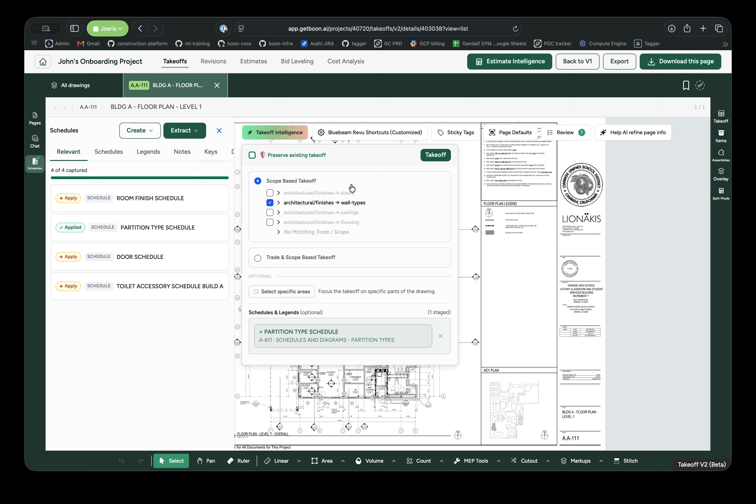Now in this beta mode, we no longer need the user to draw the bounding box. That part is being automated away. So there is a note here, let AI find the wall label for you. They always have the option of drawing it if they want to do it the old way, but now they also have an AI assist.

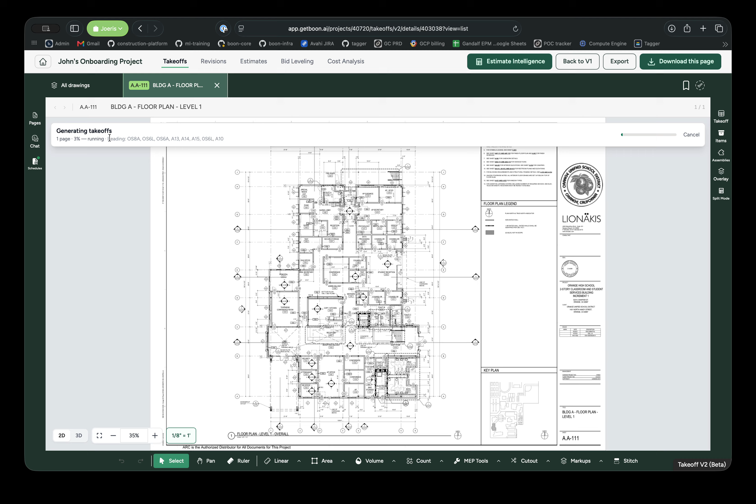And the cool part about this AI assist is how the user now gets feedback about whether it's reading the right kind of wall labels. So in addition to the percentage progress, let's say 3% running, it also informs what labels AI has detected. So here it's saying it's reading OS8A, OS6L.

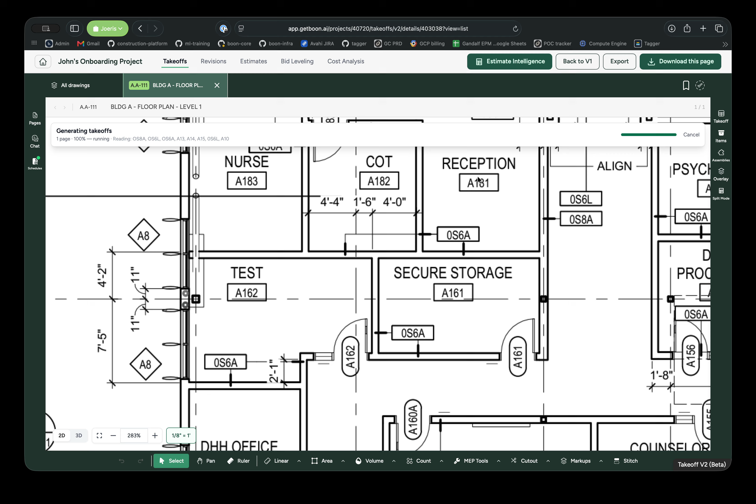As you can see, these are some of the labels that it has correctly identified, OS8A and OS6L. And that gives the user confidence and feedback while the takeoff is running that the AI is picking things up. All right, so you see the walls takeoff. It was pretty fast. We've also improved the speed of it.

And as you can see, a lot of them are now correctly assigned. So first off, the segmentation itself is very complete. So there are no missing segments, even small segments, small walls like this in rectangular spaces. They're all segmented correctly. Even these, as you can see. So segmentation recall is almost 100%.

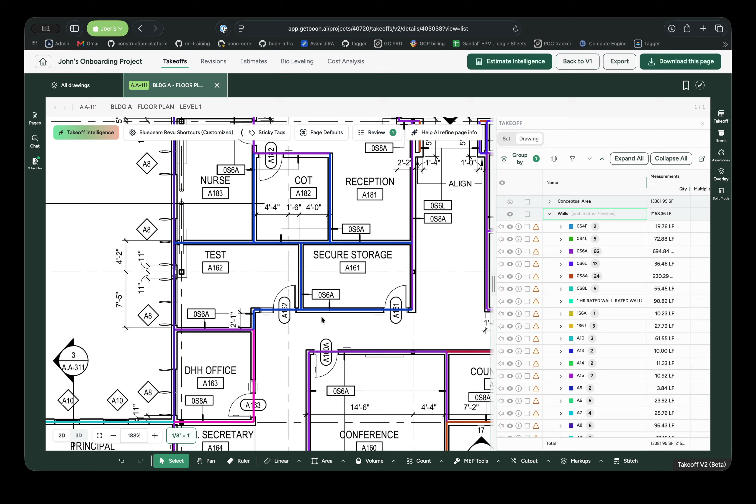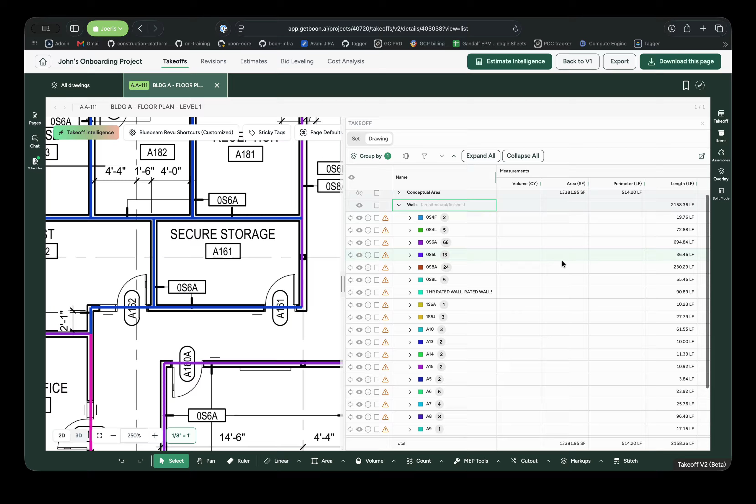No misses. And next comes the labels. So as you can see, a lot of them are labeled. Let's quickly look at the association as well. Association needs to be double checked. As we saw, it did attach the partition type schedule.

It did say applied here, but I don't see the columns here. And of course, this schedule didn't really have, let's say OS4F, it didn't really have any materials, but it had a sill column. And I don't see the sill column here. Oh, there we go, actually.

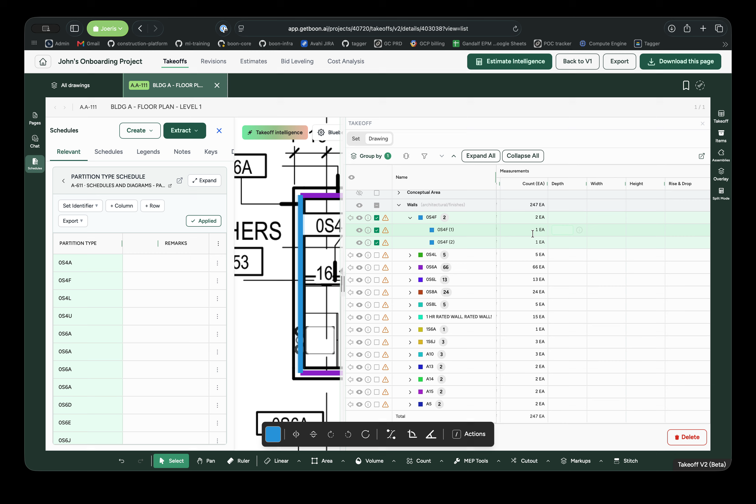My bad. We have the sill column and we have the label classification. So everything has been correctly identified and associated. Awesome. Let's look at a few of these labels. So OS4F is the one we are looking at right now.

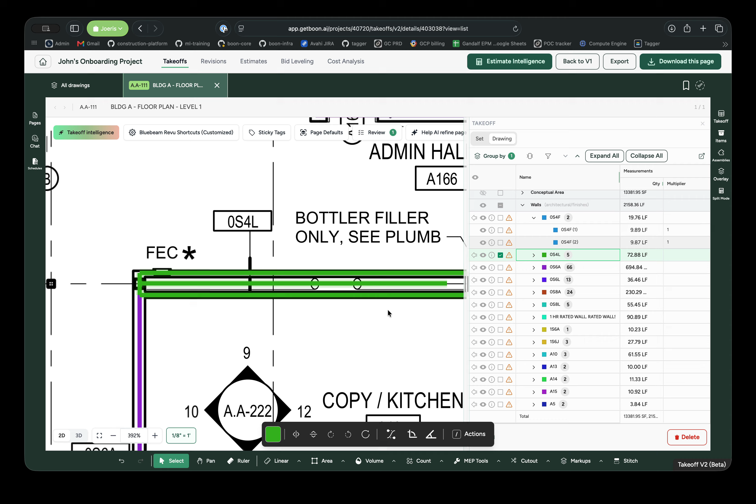OS4L is correctly this. OS6A is a vast majority of them. Yeah, as you can see, this purple one, OS6A, sorry, 0S6A. All of these.

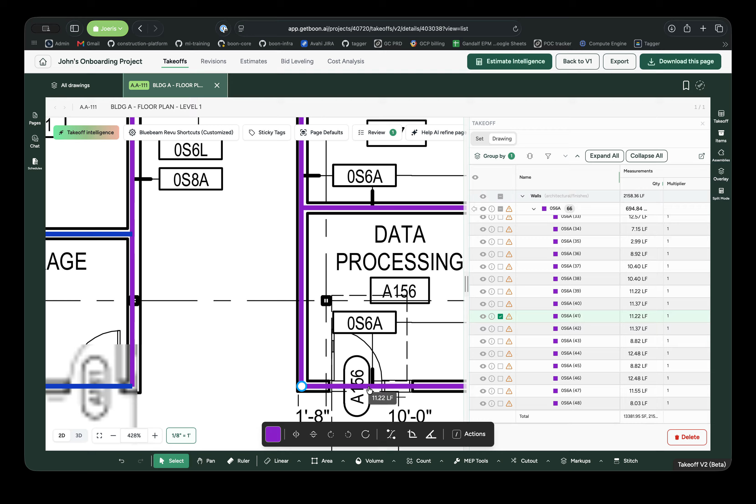Let's move on to the next one, 0S6L. Where is this? Okay, somewhere here. I think we should improve the pan and zoom a little bit on the UI side. Yeah, so it's here. Yeah, there we go. Really, really precise association.

0S6L. As you can see, this is really tricky. It is a leader line that comes here and then splits into a T shape with two leader lines on each side of it. And so what the AI needed to do is associate it with 0S6L here as well as 0S6L here, which you can see it has.

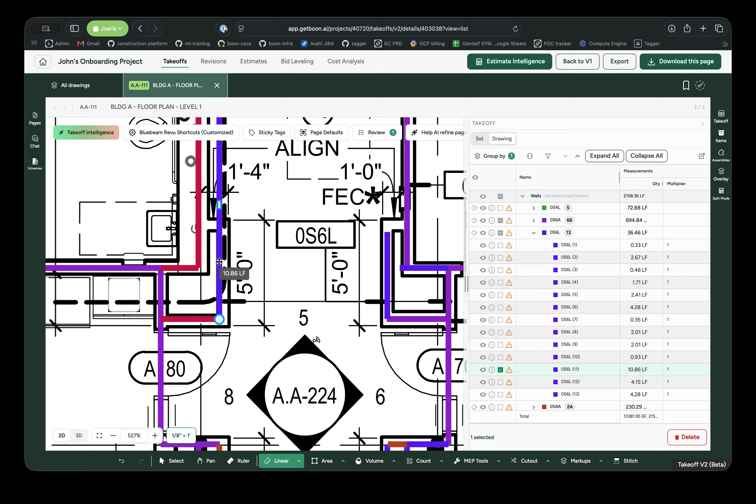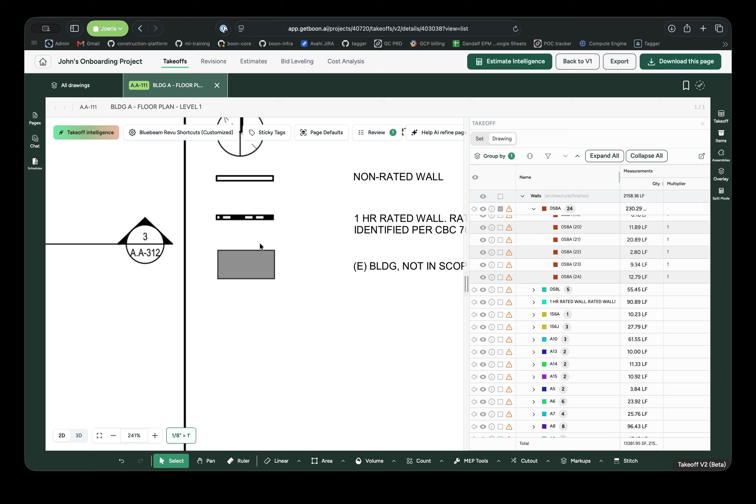Then the next ones are 0S8A, also correct, as you can see here. 0S8A are these red ones. Yeah, let's keep going. The great part is we also now added pattern based. So this has a 1 hour rated pattern here, this dashed dot line for fire rating. So now there's a consistent way in detecting the fire rating. There we go. Instead of all sorts of mishmash of phase.

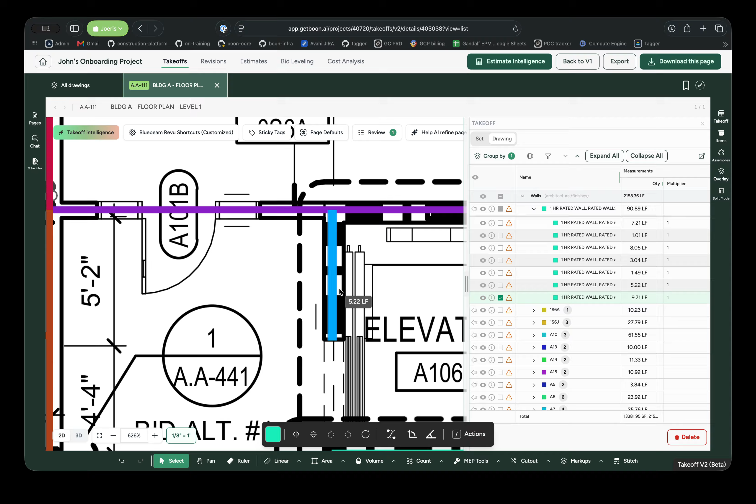So there we go. This is the fire rated wall, correctly identified because of the underlying pattern. As you can see, it matched the fire rating. And this one had no label, right? No label, only the pattern. So it's identifying the correct pattern as its requisite label. And I can keep going.

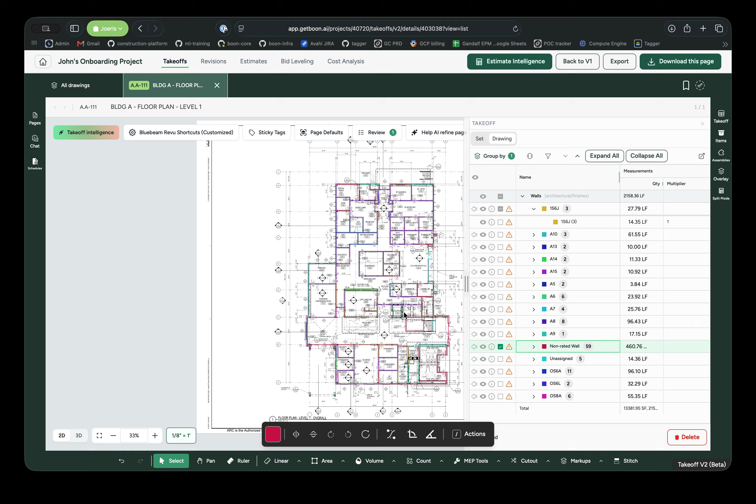So this one is 1S6A, 1S6, 1S6J. Okay, let's look at 1S6J. Yeah, 1S6J. Here is maybe this one. Yeah. A lot of non-rated walls, again going back to the pattern-based matching, non-rated wall. So regular walls that did not match anything, did not match a fire rating are of course marked as now the non-rated walls. And very few unassigned. That's our goal here.

So if you look at the overall number of walls, we have, or look at the overall linear footage, that's what matters. Linear feet, 2000. And we have significantly brought down the number of unassigned to a mere fraction, 14. Everything else gets correctly assigned.

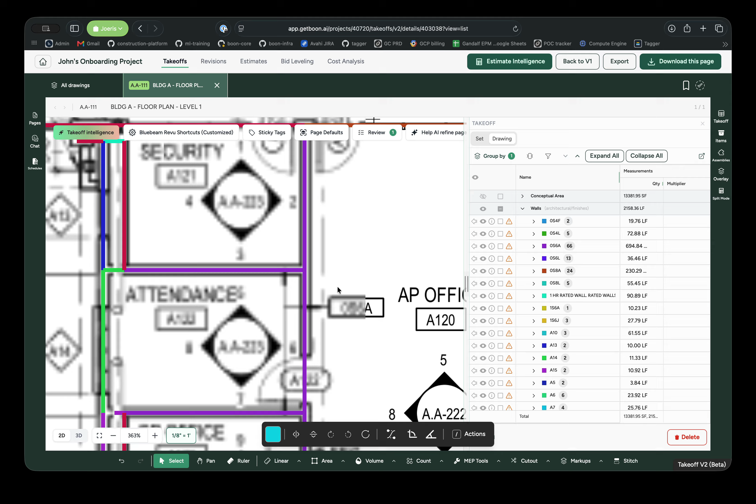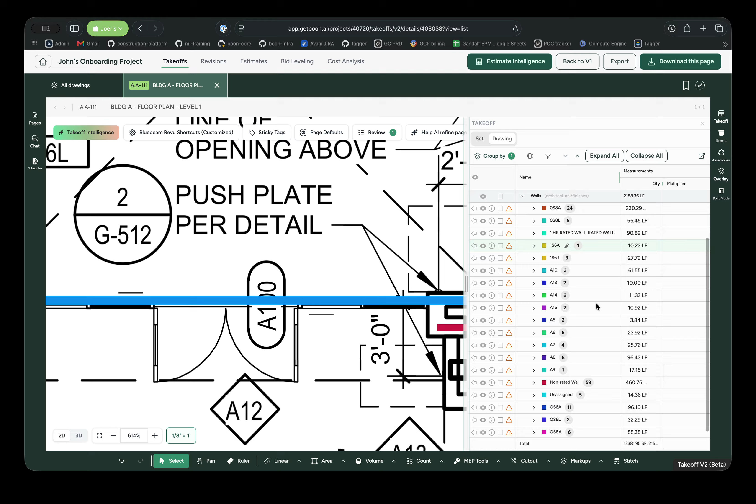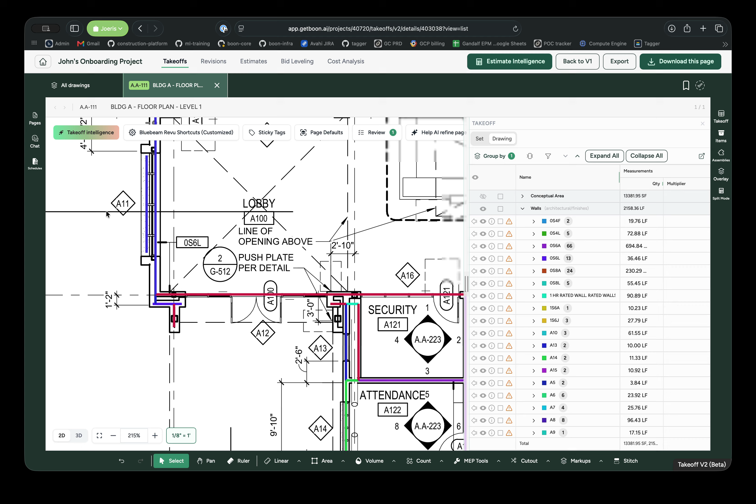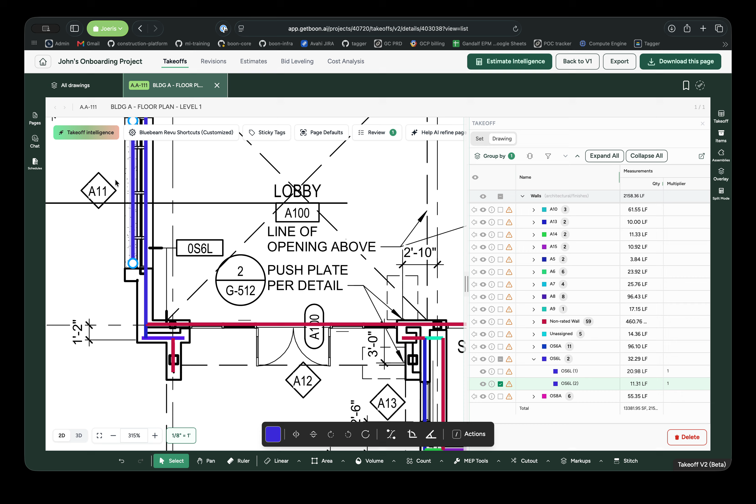Windows, on the other hand, the standard shape in most drawings are hexagons. This is an anomaly where this shape is a diamond. So the association agent is actually identifying and removing windows that are hexagons correctly. But this is an edge case that it associated this wall. Yeah, this is actually correctly associated. OS6L. Very good. To the right wall label, it did not associate it wrongly to this window label, even though it's equally close. So let me pick one of the other examples.

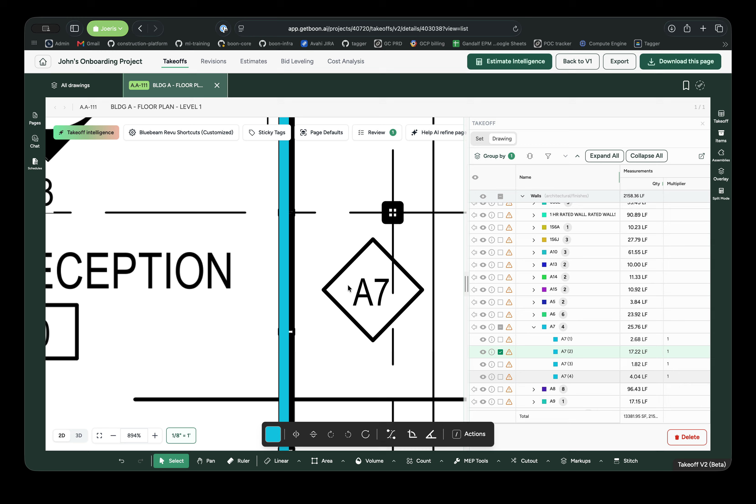A7. Okay. So this was some of those 2-3% of edge cases now where this is not actually a wall label, but it associated this to it. So it could be a window like this A6 one at the bottom, right? And we got some A6s as well. So it's now just a matter of very simple prompt tuning to instruct it like, hey, windows can also be diamonds, not just hexagons. It's as simple as that. Add it as few shot prompting to remove those as false positives.

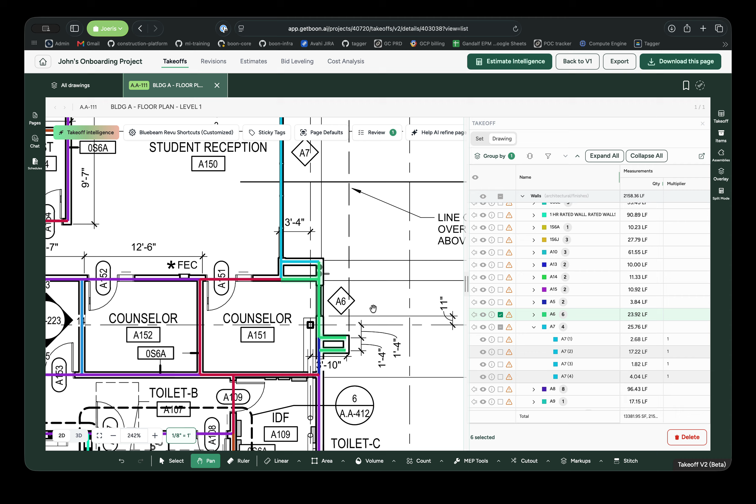But as you can see now, with wall accuracy, we are ready to start testing more and more, start putting it in front of our customers, and working towards our GC goals. Thank you.